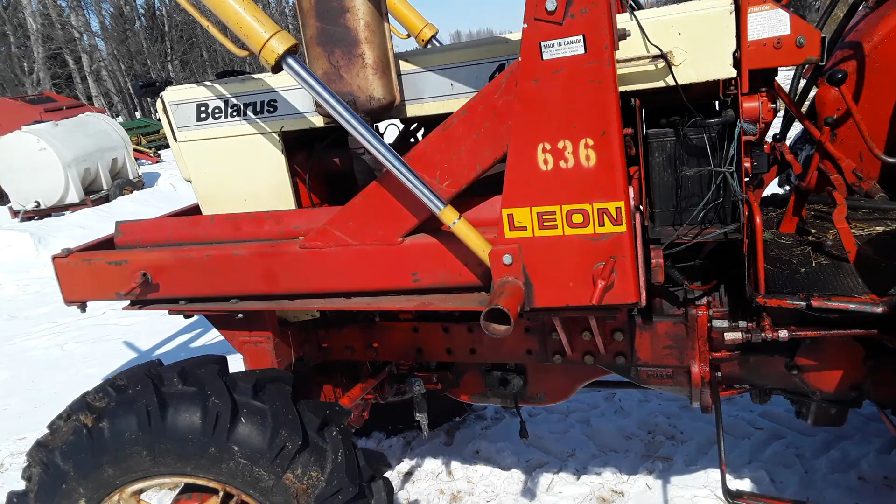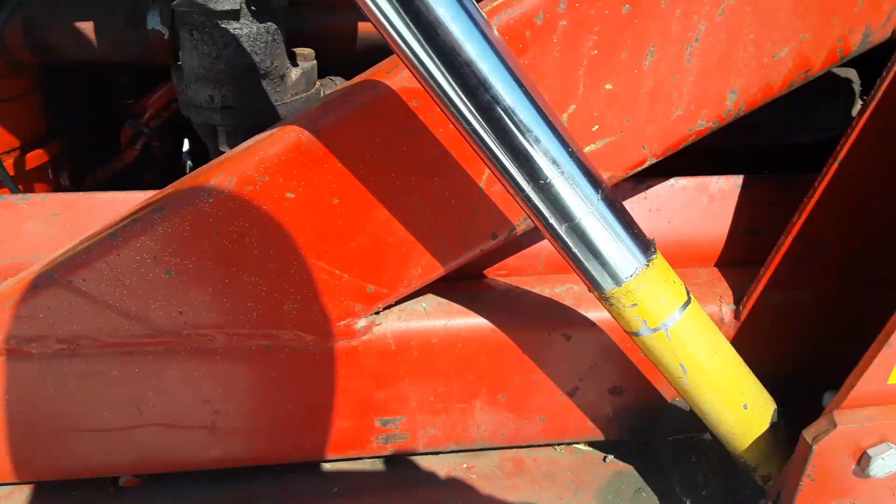So I'm just going to change the oil in the tractor. So we bedded and fed all the cows this morning, and I've had the tractor sitting out here with the loader up, cooling down for a few minutes. So right here is where you add oil when we're done. Right here is where you drain the oil. So we'll start there.

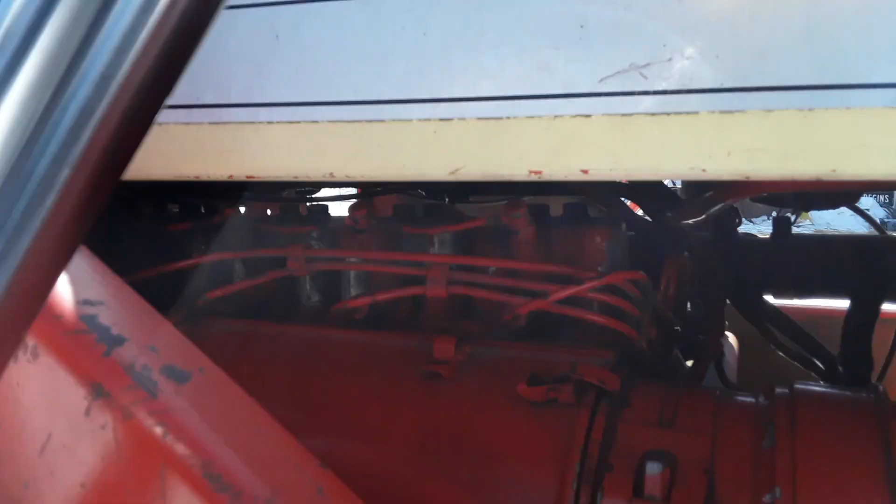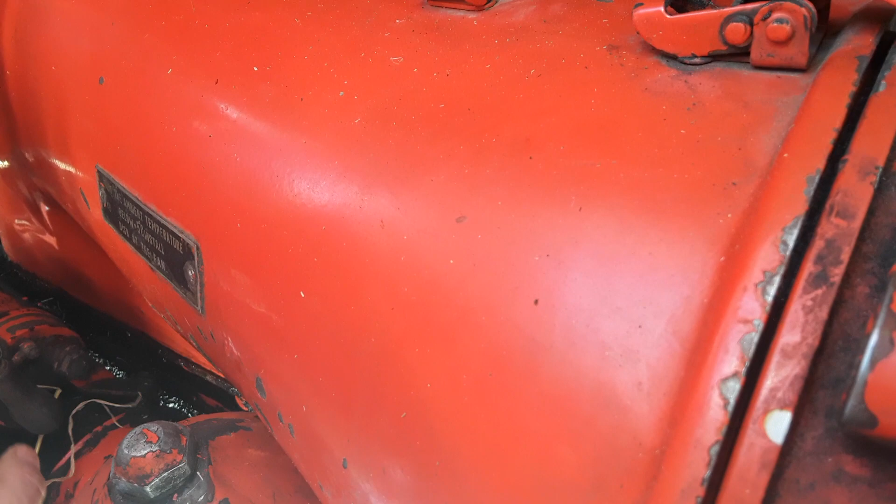And then if we come around to the other side, the reason you need the loader up is this is where the turbine rotor is for the oil filter. I can't remember if you gotta take the shroud off that I had off the other day. I kind of think you do. But anyways, I'll quickly grab the owner's manual because I can't remember exactly how this turbine comes apart. This nut here basically just pulls the shell off, and then I think there's a secondary nut. There's a type of screen looking thing, so go look at the owner's manual for a second.

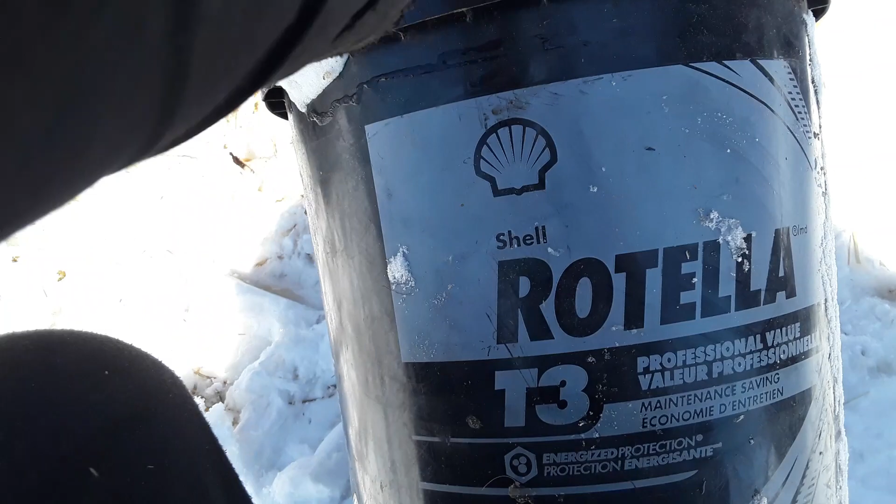Then what everybody and their dog sells in Alberta is Shell Rotella. This is T3 bulk. I think this is fleet. It's 15W40. This is an empty pail. So that's what we'll be using, is either this or Rotella. But even Canadian Tire's given up, again 15W40. Even they've given up, and they now carry the Shell symbol on the back of their pail. They used to pretend, and used to say made in Canada from domestic and imported content, but now they've got the little Shell on there.

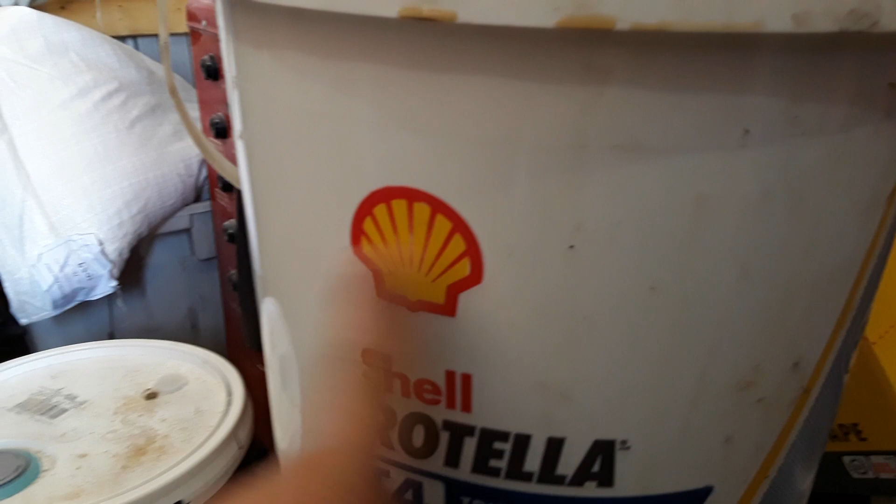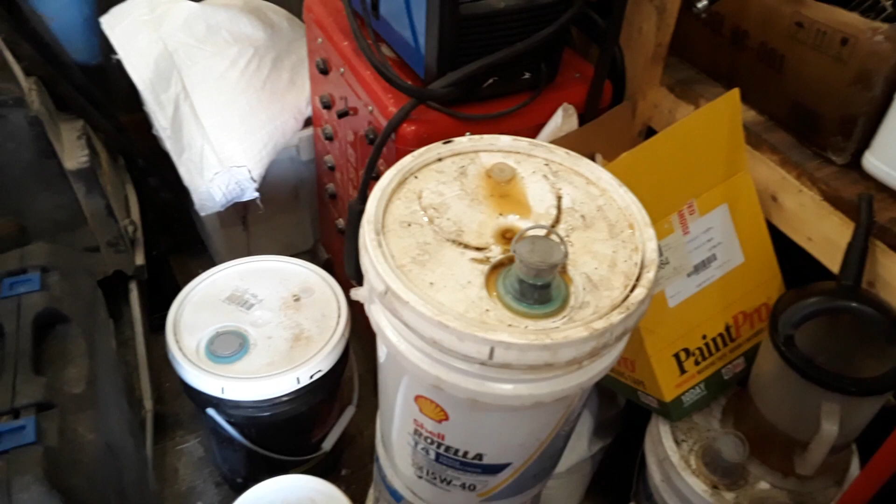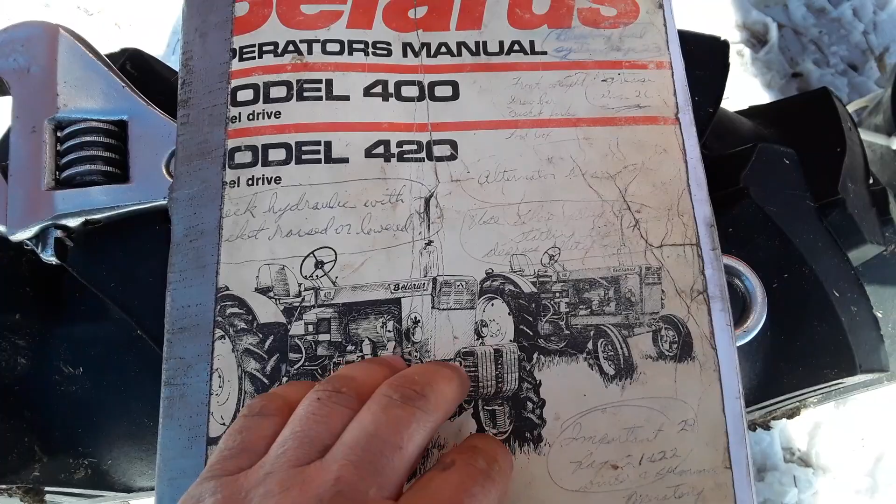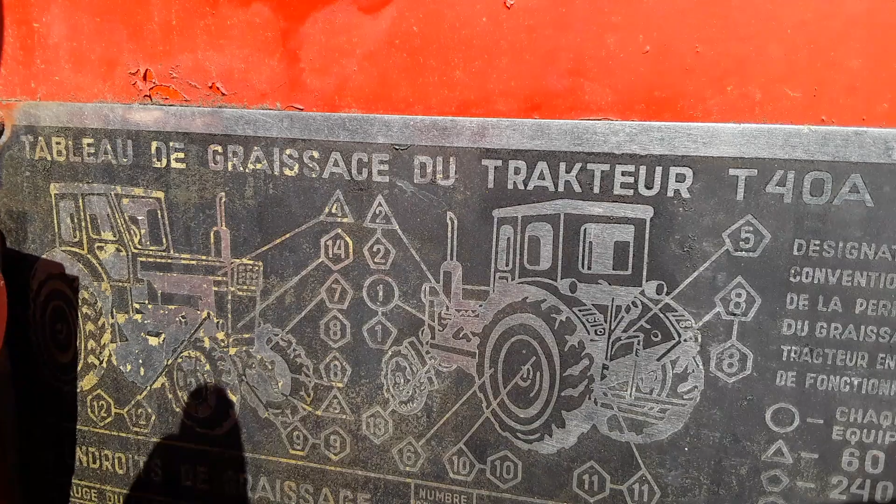Okay, there's the operator's manual, owner's manual for the 420 Belarus, which is a T40. Right there. Table of greasing the tractor T40A. That's the greasing interval. And again, this is basically Belarus tractor factory. Tractor T40A, so in Cyrillic, a P is an R, a K is a C, and then you have to do the different letters. This is ZAVOD, which is factory in Russian. So yeah, 1978, that's what I said the other day, I think.

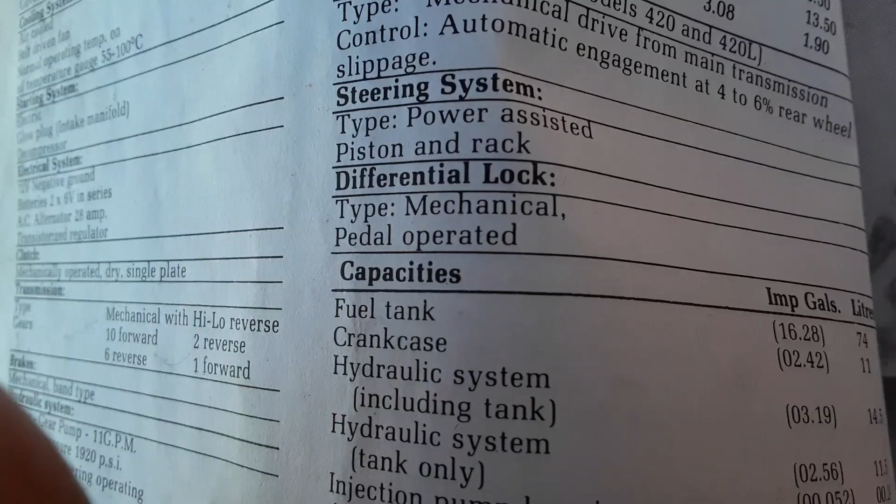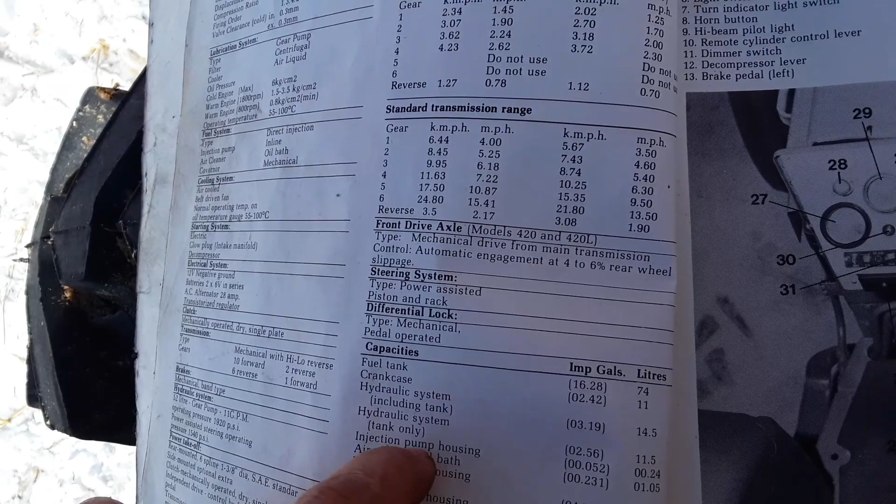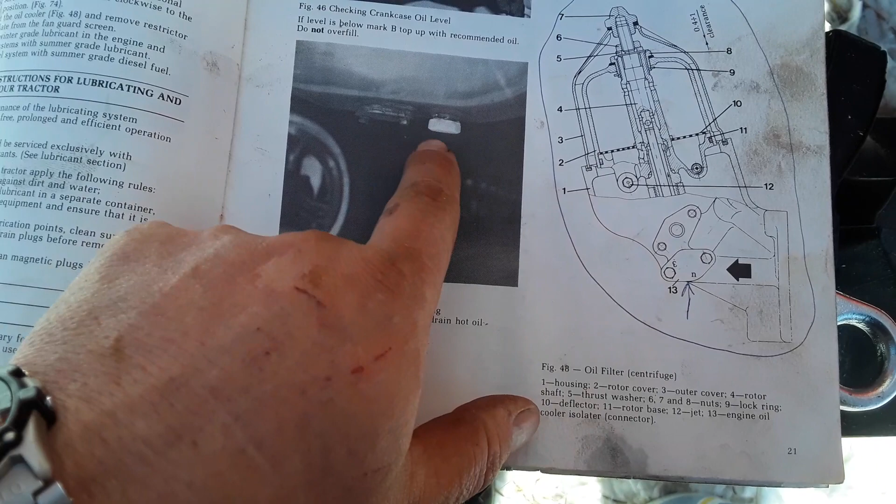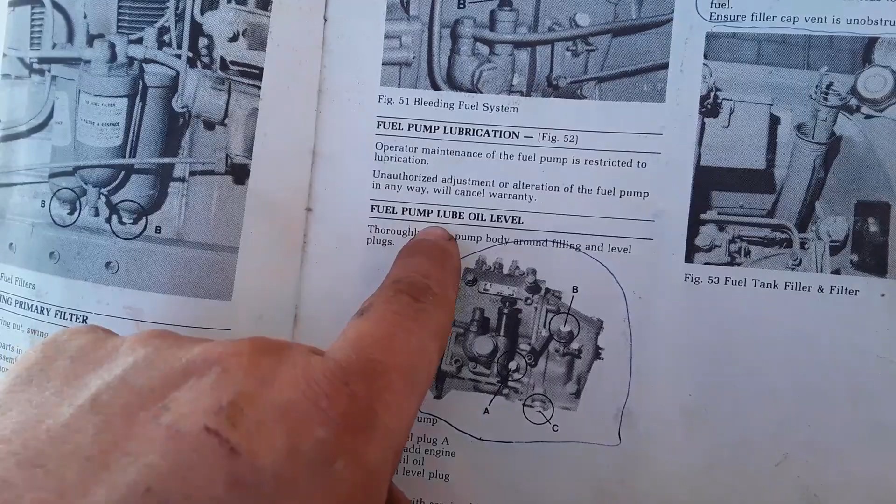Okay, crankcase, 11 liters. So I can't remember if that includes when you do the little filter there or not. But on the filter they call it centrifugal. The Russians' owner manual is pretty good. It gives you the drain plug information and then the rotary oil filter and the procedure. And then one other thing we got to check here is fuel pump lube oil level. And you just use whatever you're using for engine oil.

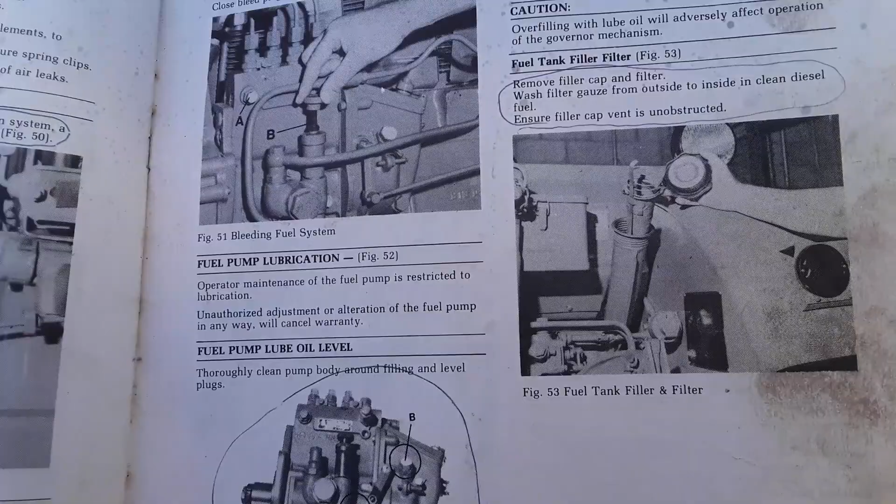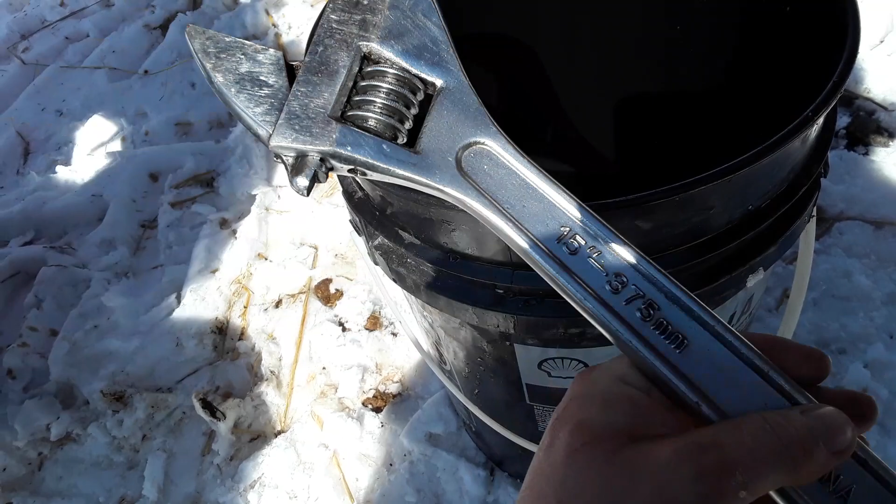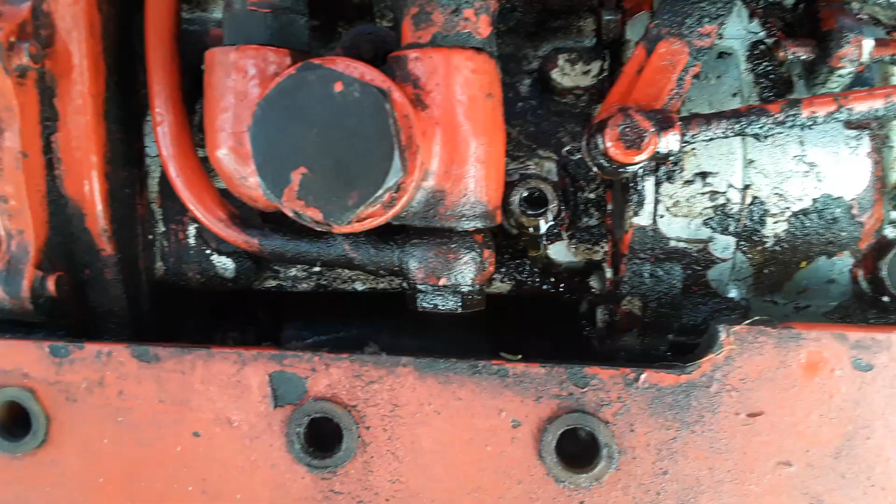So there's our bucket, that's a T3, gonna drain the oil into. And in true farmer fashion, we're gonna use a 15-inch crescent wrench. And there she is draining away. So we'll let that drain. Okay, approximately half a bucket. So pretty much done. So in my opinion, Belarus has got a bad seal in this fuel pump, as I always push out a lot of diesel fuel. We're just starting to get to the 15W40.

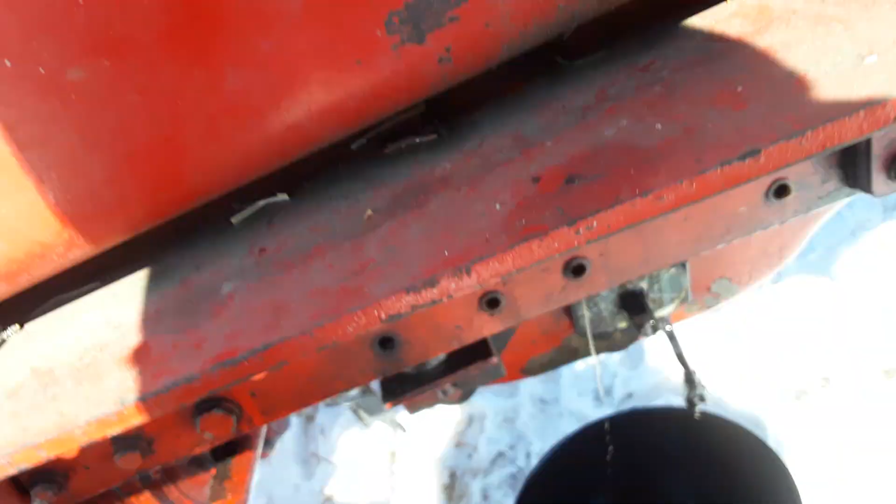So when I first was doing it, as per normal, there was a ton of diesel fuel coming out. And now we're just getting to the 15-40 that I put in there, so it's purging out the diesel. So I always run a little bit of used or clean engine oil through and purge all that diesel out of there, because it's thinning that oil out. That 15-40 is probably more like 5-30 or something.

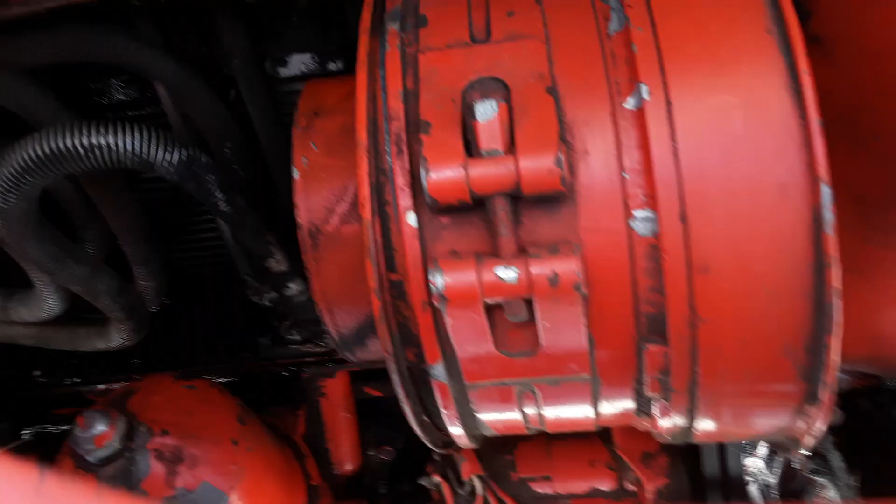Okay, that's 27 on the nut here, on the rotor cover. So you just spin this nut off. It's a copper washer, like so many other things on this tractor. Careful not to lose that. That's your seal for your cover. Then I thought this was marked before, but I just marked it with a felt. I'm certain it was marked before.

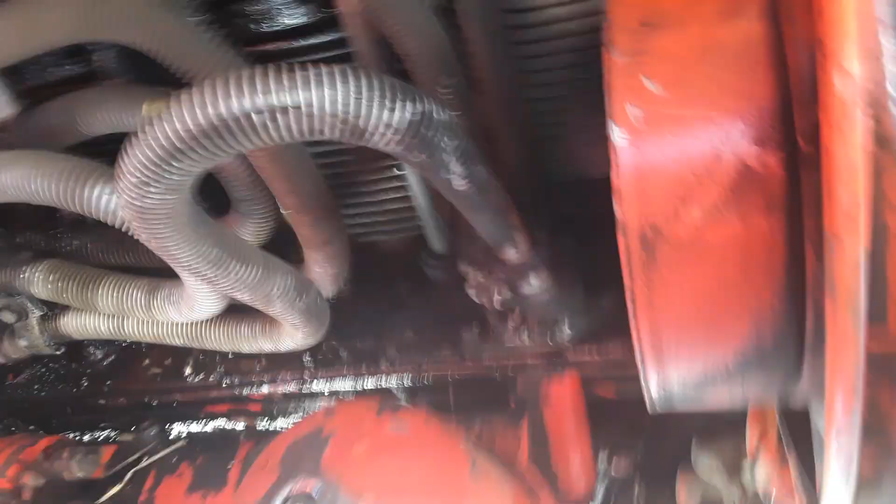So there you go. That's the inside. There appears to be a little bit of rubbing, but this is how it works essentially. It spins around in here. So anyways, I need to get the wrench and take that off and check that out. Okay, so that's a 19 on there, and then you just simply lift this up.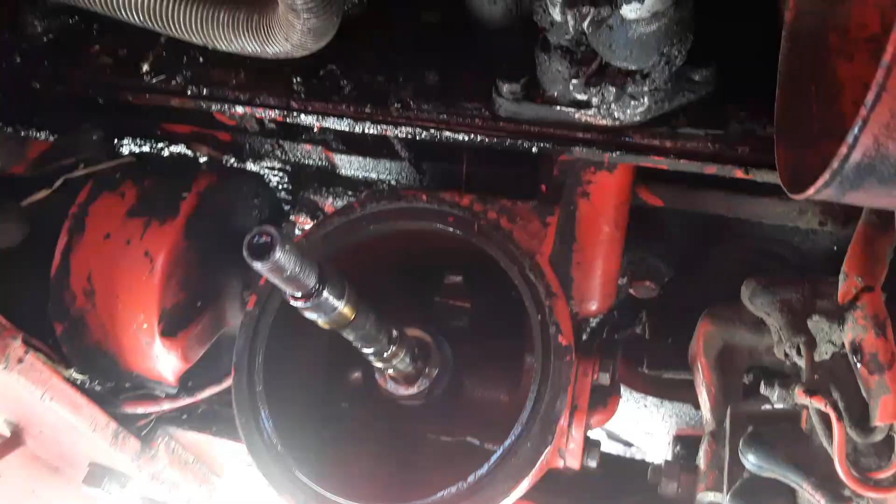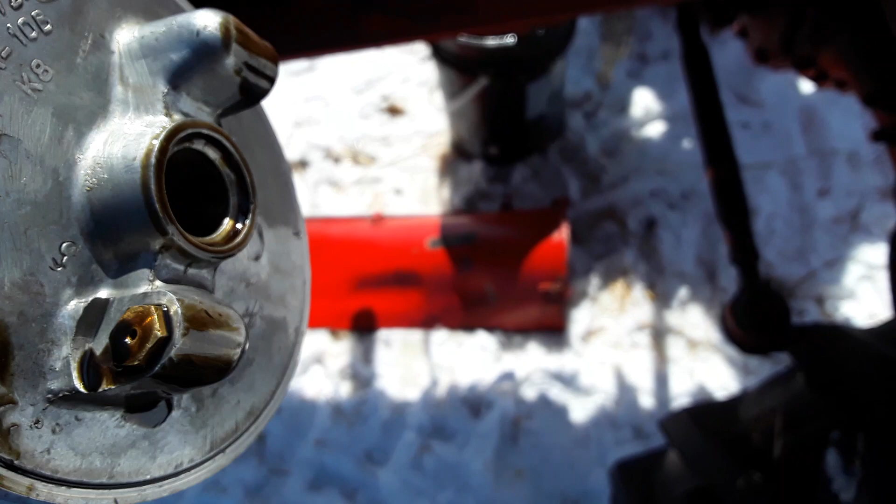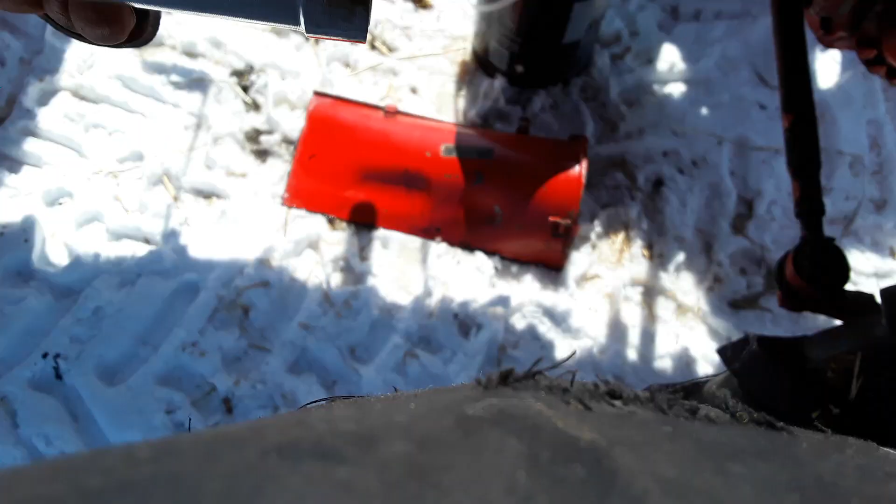That's the inside of the filter housing, and then this is the rotor, and there's jets there and there that you just clean up, and that's what propels this around the casing in there, is the pressure coming out of those jets. Forgot to mention, you have to mark it. So the guy that owned this before me, he had it marked.

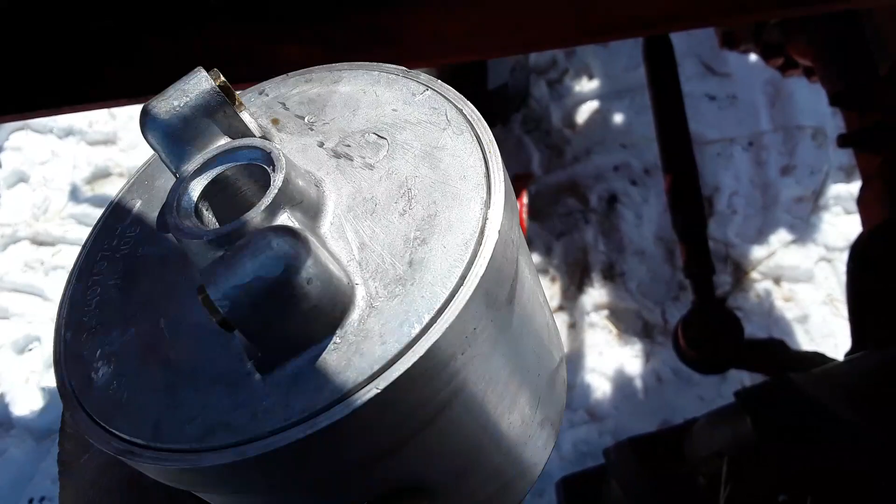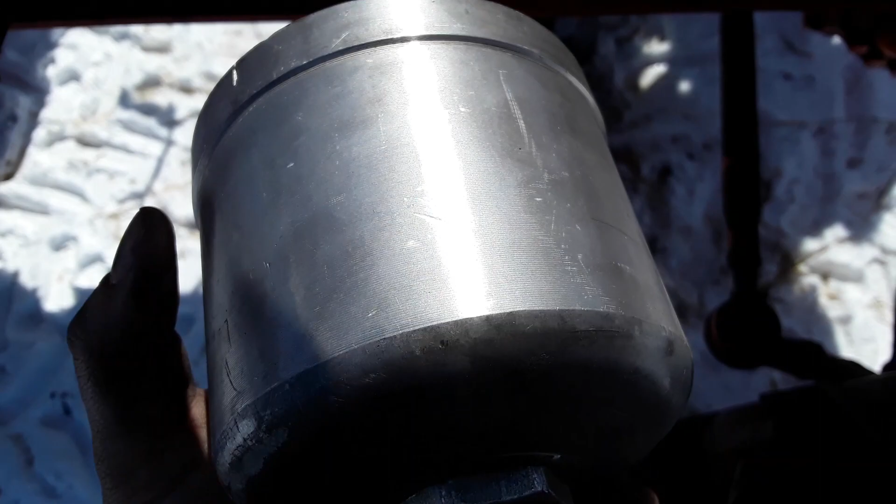Okay, I forgot to take the camera and film taking this apart, but essentially you take that large nut off, it pulls apart, there's some oil galleries in there, a strainer screen, and then the rotor itself. Make sure you mark it if it's not marked. And the grime is on the walls and in the passages. So the Russians have a technique for cleaning it. I just hose it all down with brake clean. Clean out the passages. You want to make sure the jets are not restricted.

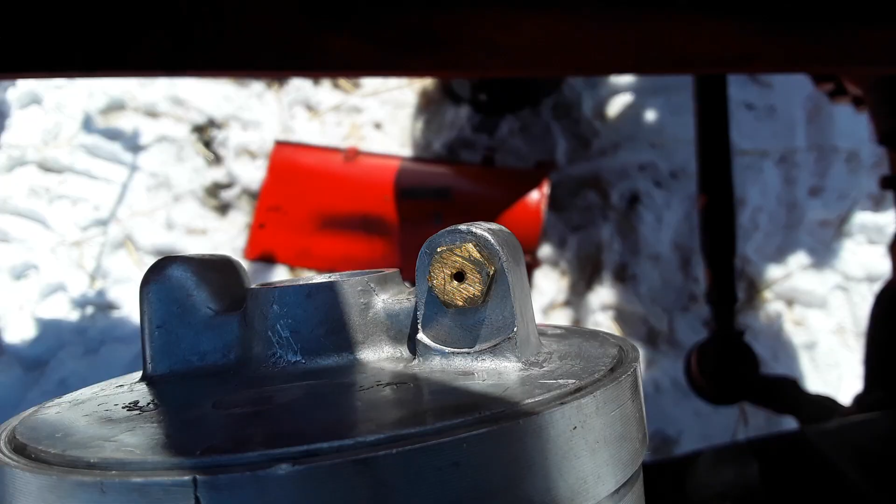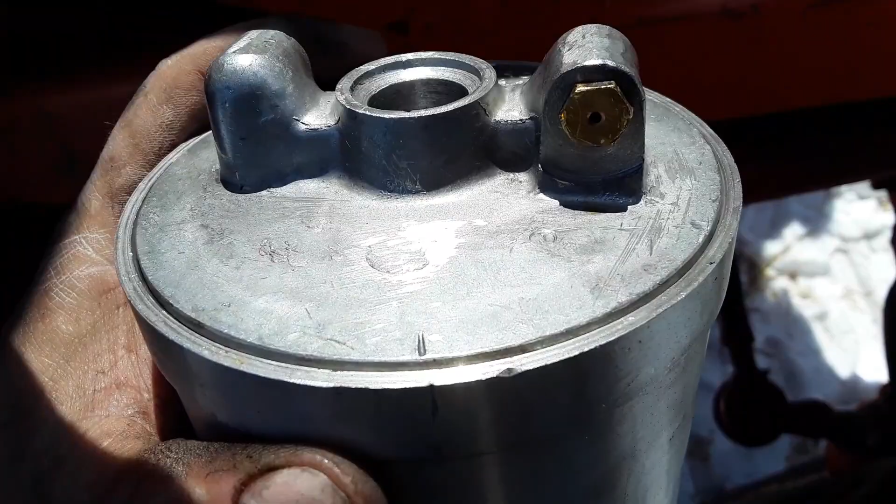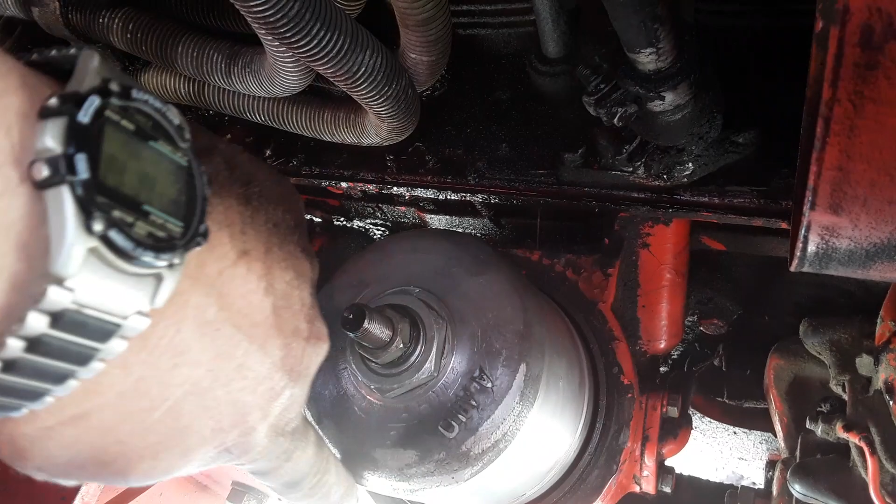And then you tighten this large nut back down on the shaft that passes through, and align your marks, and then put it back in here. Okay, tighten your nut. There is a torque value for it. I don't know what it is. Basically, you need the rotor to be able to spin. This is tight, and the rotor still spins. And then there's the warning every 120 hours.

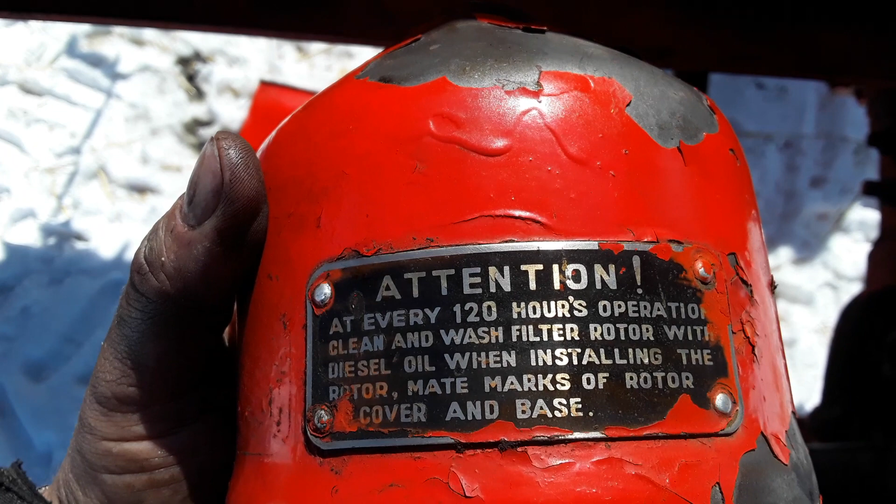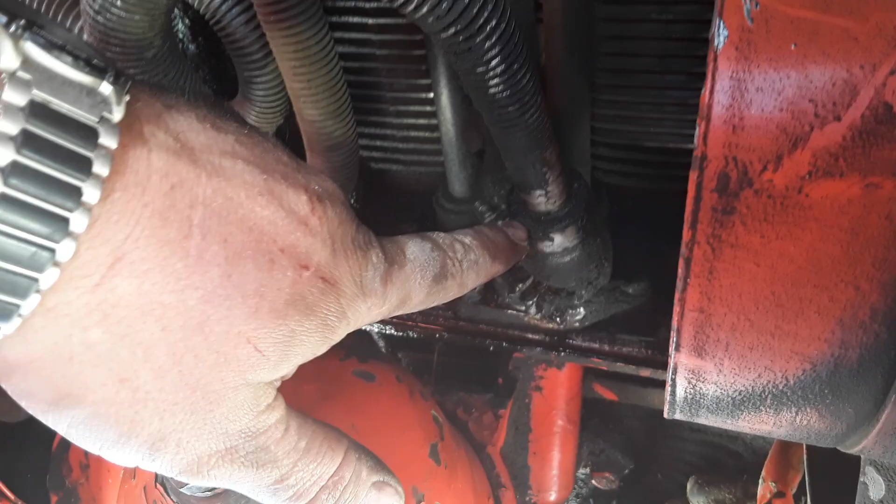And then with the 27 millimeter wrench, tighten that nut back on. This is stationary, and when you shut the tractor off, you should hear the rotor spin for, I don't know, up to 30 seconds. So the good news is this appears to have stopped leaking on the cooler in here. So that's positive, but we have fresh oil over there.

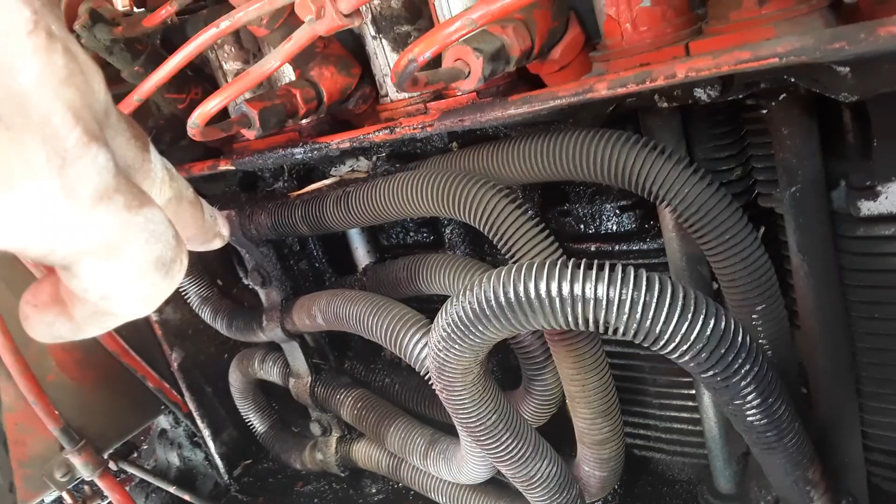So the oil leak continues, and it could be these heads. So we're at 1,000 hours on this tractor, so it needs a valve job, and the head bolts I think are 2,000 hours. But if we're going to do a valve job, we're probably going to do the head bolts. So probably look at doing that when it gets warmer. So I'll put the shroud back on here.

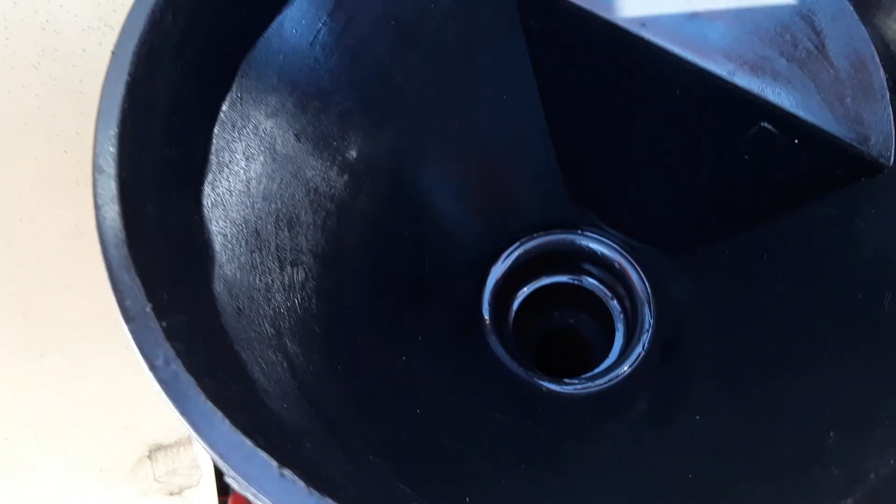And then these air-cooled D144 Deutz copies are notorious for running hot. So you have to ensure you get the shroud back on here properly, because the smallest crack and you're giving up a ton of your cooling. And then you add oil right down there. This looks about a half a bucket, so I'm going to say it's 11 liters, and then we'll check on the dipstick, which is down in there, just to make sure. Okay, according to the dipstick, we're right up to the level there, so we'll start her up.

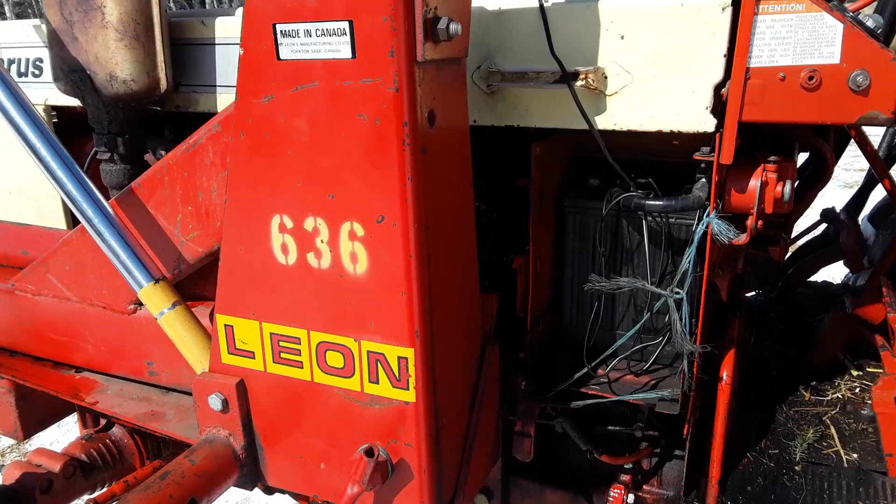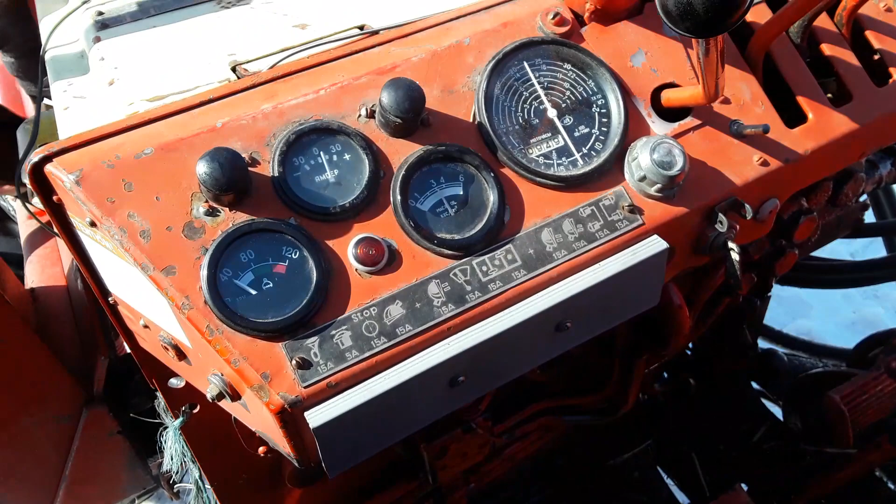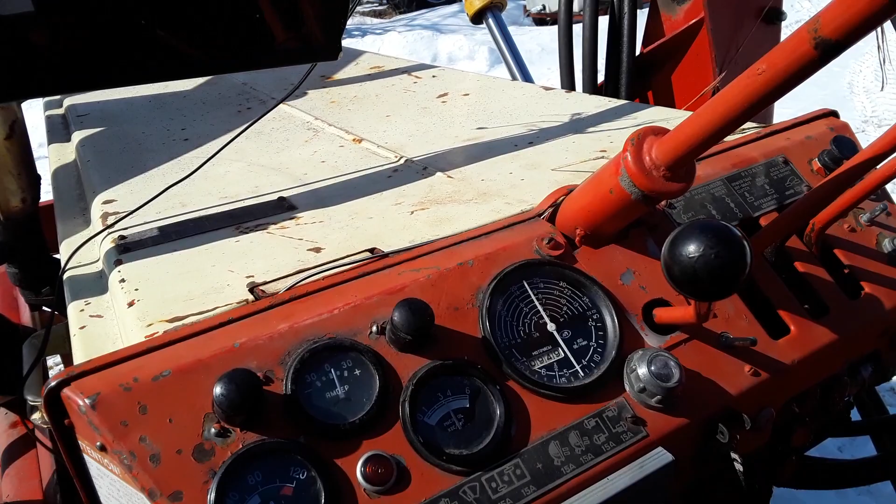And that's about where it runs when it's warm, is 3, just over 3. When it's cold, it's closer to the 4. That's pretty much it for the oil change, and I'll go put her away, and then I'll check her again before I use it.